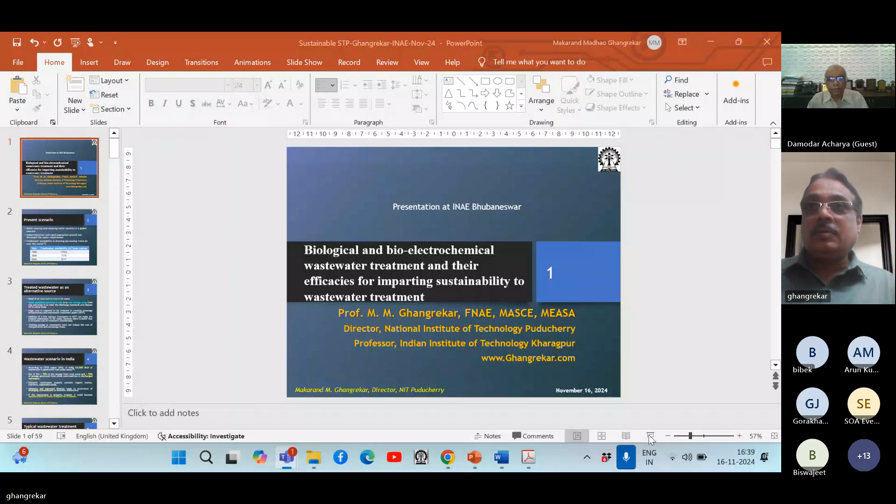Yes, sir. Yes, yes. Just, sir, confirm my presentation is visible. What, visible? Yeah, thank you, sir.

Thank you, Professor Damodar Acharya, for giving me this opportunity to present the work majorly that we have done, that we have been doing at IIT Kharagpur under various projects, and also the other institutions like IIT Bhubaneswar, NISER Bhubaneswar, CSIR Lab, and Shiksha Anusandhan, for organizing this event, and for the initiative taken by Professor Acharya to invite me. Also thank you, sir, for the elaborate introduction that you have given.

Over the next 1 hour, I'll be delivering a talk on the application of biological and bioelectrochemical systems for imparting sustainability to wastewater treatment.

We are all aware that water scarcity is being faced by almost all countries, and ensuring water security is a global concern now. Particularly in the Indian scenario, if we look at every year, there is a drop in the availability of fresh water. It is estimated that what was 17,500 in 1960, the fresh water availability will reduce to about 5,700 meter cube per capita by 2025.

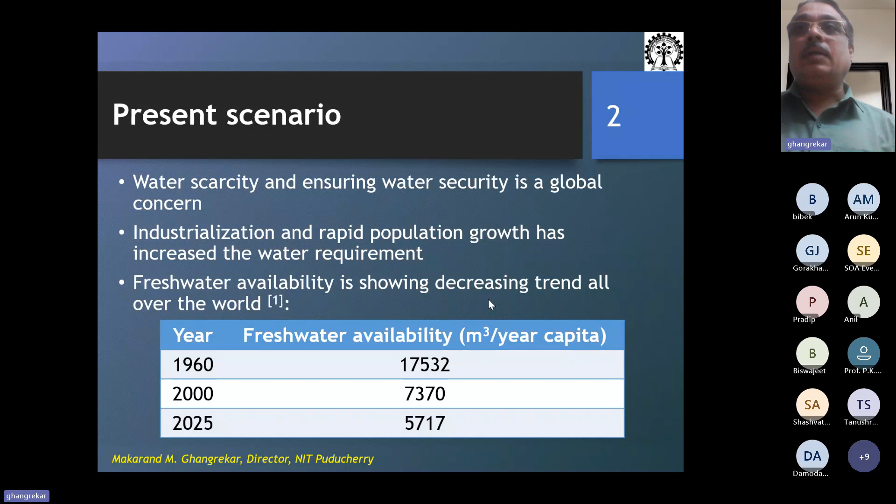So to meet this gap in demand, we need to find alternate sources for water. We consider that the municipal wastewater generated in all the cities could be considered a reliable source, provided we are able to offer treatment at affordable cost to this municipal wastewater to produce reusable quality treated water.

Now, what are the sanitation practices currently being followed in most cities in India and many other countries? It is centralized sanitation. In this system, all sewage generated from the city is collected through a network of pipes, what we call a sewerage scheme, and it is taken far away from the city where it is partially treated or treated, and the treated water is disposed of.

Now, with this model in place, if we target reuse of the treated sewage back in the town, then a third set of pipelines need to be laid, which will be a very costly affair. Already we have a water supply scheme, already we have a sewerage network, and then placing a third network, that too bringing the treated sewage from this far distance, will be a costly affair.

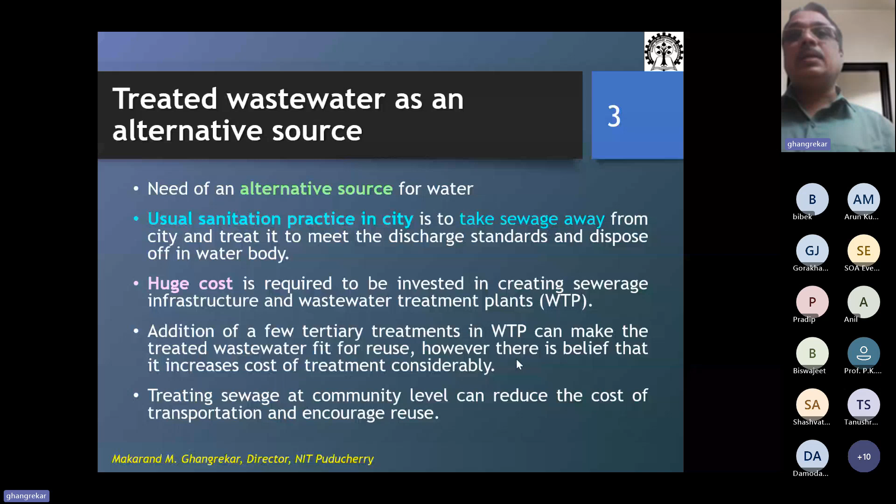Hence we need to go for decentralized sewage management. So sewage generated from a locality should be treated there itself using proper technology choice, which offers reliable treatment so that the treated water reuse can be facilitated.

The Indian scenario is not very encouraging. As of today, though the Government of India is very much aggressive in improving the sewerage infrastructure, even today only about 37% of the sewage generated in this country is being properly treated, and the rest is being discharged into water bodies, polluting various water sources wherever the water is getting discharged.

This domestic wastewater majorly contains organic matter, nutrients, other suspended solids, pathogens, and the concern today is the presence of emerging contaminants - personal care products like shampoo, skin ointments, other cosmetics we use, and also antibiotics or painkillers we consume. These are not consumed 100% by the body, and 50 to 70% of it is released through waste. So these are the compounds which are released into the water body, preventing its reuse for various purposes.

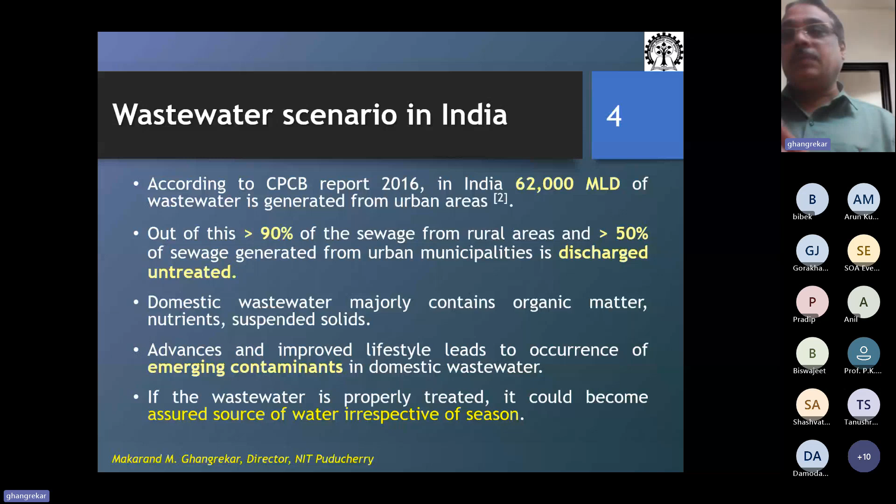If we are able to provide reliable and proper treatment to this wastewater, then irrespective of the season, the municipal wastewater is an available source. We all know that many states during summer, when there is a shortage of water, cut down the water supply by maybe 10%, 20%. That scenario will not be there, because if the sewage is being properly treated, the municipal wastewater properly treated could offer a reliable source.

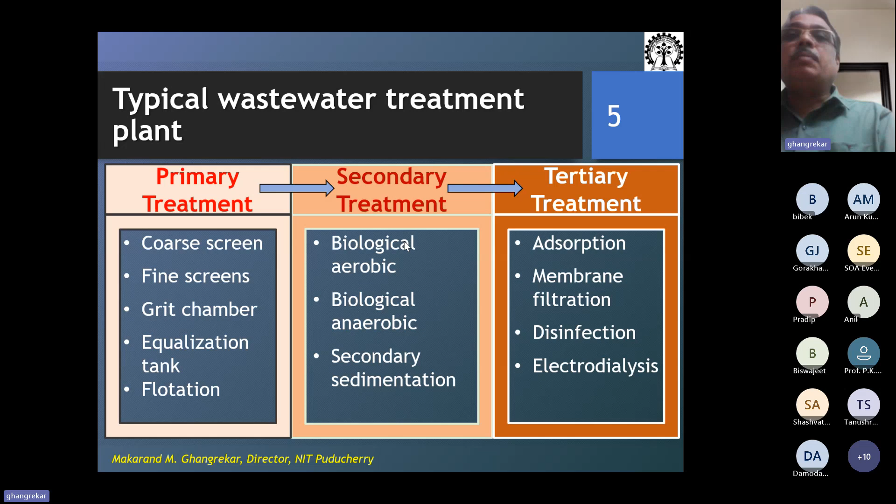Majority of you may be aware that typically the wastewater treatment systems, whatever wastewater treatment plant, we classify into primary treatment, secondary treatment, and tertiary treatment, provided we are targeting to reuse that wastewater. Generally, when we say conventional sewage treatment plant, it comprises primary and secondary treatment only, producing treated water not that suitable immediately to be reused for various purposes.

Primary treatment is necessarily meant for removal of floating and suspended matter, and removal of grit or inorganic matter.

Yes, sir. I'm audible, sir.

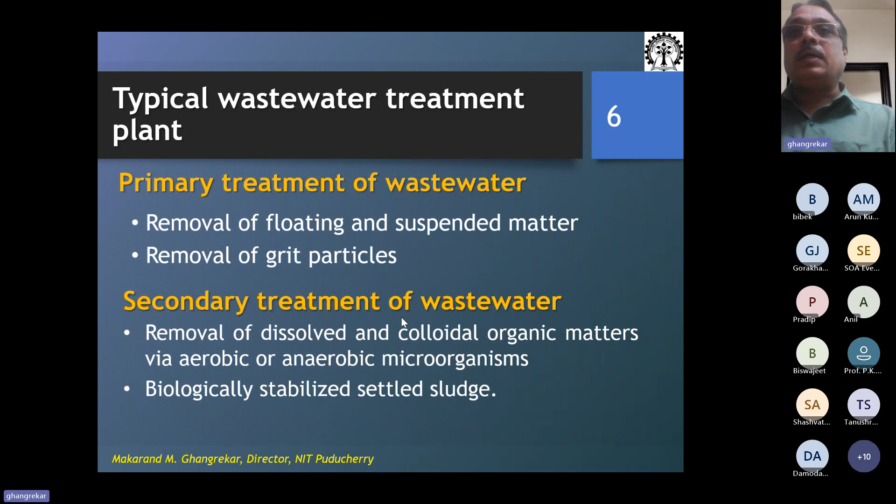So removal of suspended and floating matter is done through primary treatment. Secondary treatment is typically employed for removal of organic matter which is present in colloidal or dissolved form after primary treatment. Also, the sludge generated in the process is managed while secondary treatment is provided to the wastewaters.

The secondary treated effluent may not meet reuse quality norms, and hence further treatment, which we classify as tertiary treatment, is required for further removal of organic matter, nutrients, turbidity if any, pathogens, and color and odor removal. Generally, in municipal wastewater, color and odor are due to the presence of organic matter, and if we remove this organic matter effectively, the color and odor will go away.

But the major and emerging concern is the presence of emerging contaminants, like personal care products, antibiotics, and painkillers. These are present individually in nanogram or microgram per liter concentration, but put together they represent about 20 to 30 milligram per liter in terms of total organic carbon. This is why we are hesitant to call the water potable even after adequate treatment, if these emerging contaminants are present.

Because some of these compounds are endocrine disrupting compounds and can disturb the hormonal system, even human hormonal systems, even at much lower concentrations if present in the water we consume.

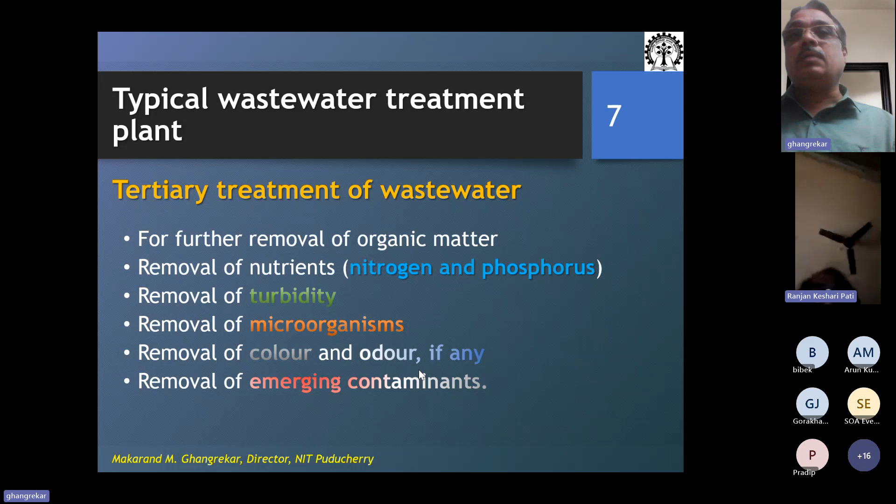The National Green Tribunal in 2019 came up with a very ambitious recommendation that for mega cities, municipal wastewater should be treated to a pH of 5.5 to 9, BOD less than 10, TSS less than 20, COD 50, total nitrogen 10, and total phosphorus less than 1 milligram per liter. They also made a stringent standard for fecal coliforms, which are of intestinal origin: desirable 100 and permissible 230 MPN per 100 ml.

Whereas the Ministry of Environment and Forest has accepted more or less the class 1 city standard, that is BOD 20, TSS 30, COD 100, and total nitrogen 15. However, we anticipate that any new sewage treatment plant coming up for urban areas should meet the NGT recommendation of BOD 10 milligram per liter, COD 50, and total nitrogen 10 milligram per liter.

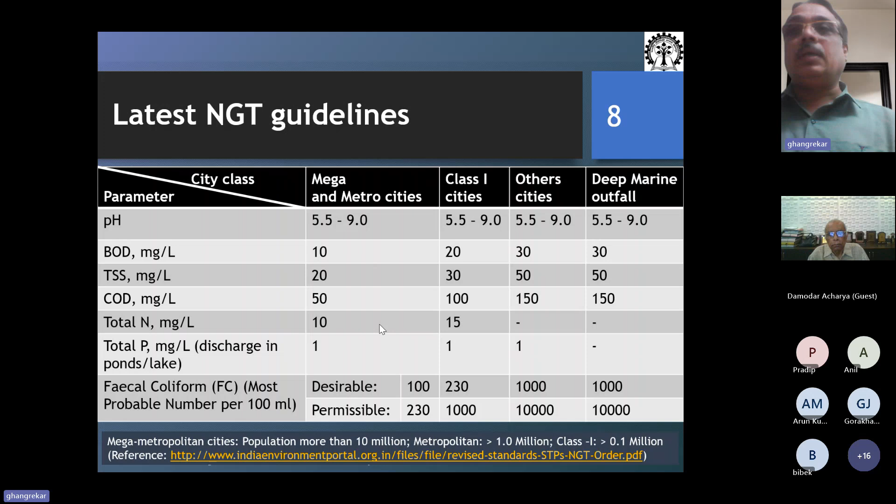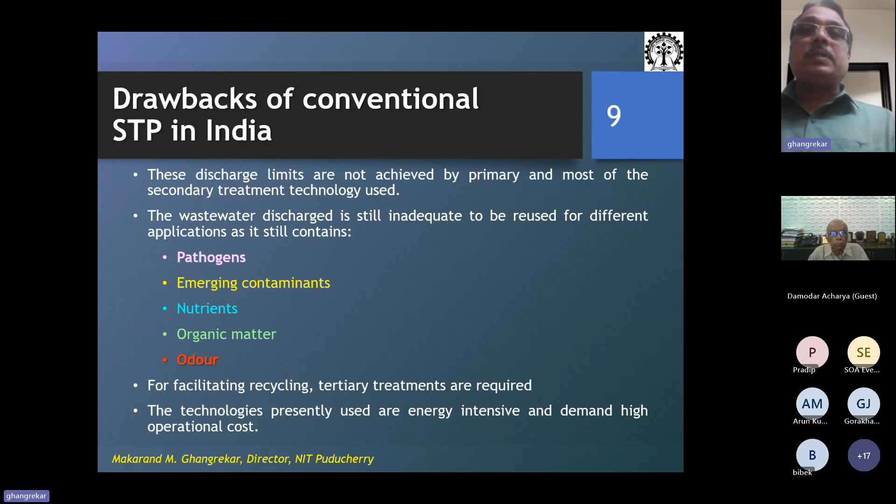So the drawbacks of conventional sewage treatment plants, with primary and secondary treatment, in India most sewage treatment plants employ the activated sludge process. These NGT expectations are difficult to meet because it still has considerable pathogens, emerging contaminants, nutrients, and organic matter, and because organic matter is present, there is also residual odor in the secondary treated effluent. To facilitate recycling, we certainly require tertiary treatment, which should be affordable.

We all know RO could work as an effective tertiary treatment solution. However, considering cost in the Indian perspective, depending on plant size, using RO after secondary treatment will cost about 30 to 50 rupees per kiloliter of water processed. So primary and secondary treatment costs around 10 rupees, plus 50 rupees if I add RO. If we end up producing treated water at 60 rupees per kiloliter, obviously there will not be takers for this, so we need to keep cost under control.

For that purpose, we need to select mid or low energy consuming technologies, and technologies involving low cost components, so that periodic replacement of perishable components doesn't add significantly to treatment cost. At the same time, the technology should be robust to seasonal variation, and should be able to give expected and reliable performance.

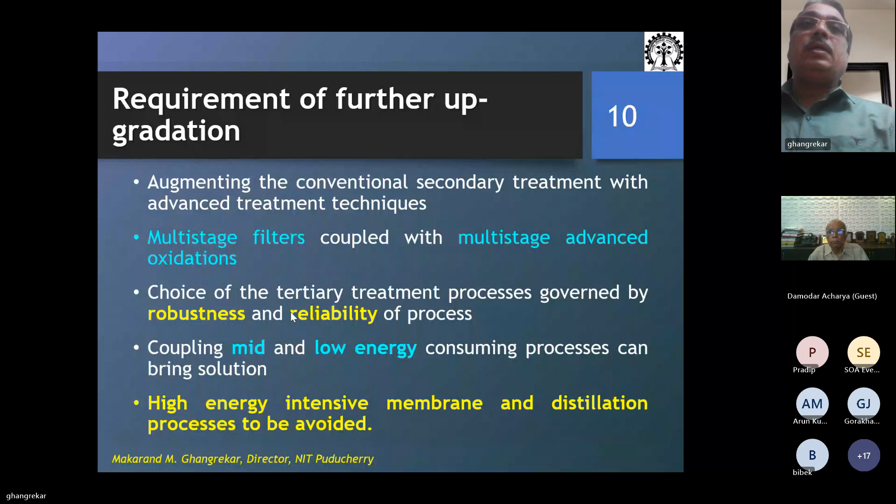For imparting sustainability to sewage treatment, so that stress on freshwater demand can be reduced, we can explore algal technologies. Harvested algae can be utilized as a feedstock for biofuel production, giving us an opportunity for revenue generation.

In the last two decades, scientists have been concentrating on developing microbial fuel cell-based technologies, which is a one-step process. While treating wastewater, it also provides an opportunity to harvest electricity directly in that one step, so the electricity can be used on site, fetching additional revenue.

Sewage sludge to activated biochar: in the last 5 to 7 years, scientists have been concentrating more on this aspect. This biochar or hydrochar generated from sludge has applications in tertiary treatment as an adsorbent, or in other industrial effluent treatment plants. This biochar can also be used as a soil amendment for enhancing crop productivity, or this hydrochar can be used for other industrial applications, or as a fuel since it is a high calorific material with calorific value at par with coal.

Biomethanation is now an almost mature technology. According to my knowledge, in India we have more than 50 large-size sewage treatment plants employing anaerobic reactors for recovering methane while treating sewage.

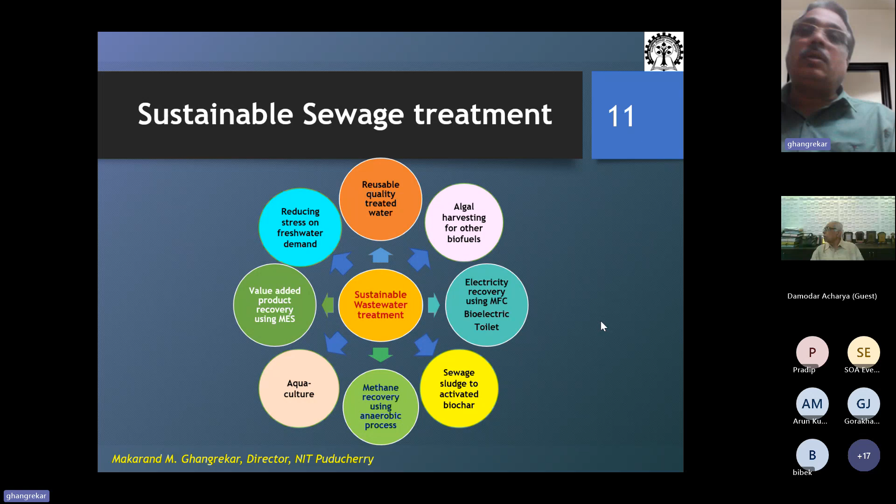So the list is not complete. There are many other avenues, but at IIT Kharagpur, me and my research group mainly touched upon these technologies for imparting sustainability to wastewater treatment.

So in 2015, with funding received from the Department of Science and Technology and European Union, we constructed a UASB - upflow anaerobic sludge blanket reactor-based sewage treatment plant with a capacity of 400 cubic meters per day. This plant was designed by me, and since then it is in operation.

With a height of 5.3 meters and diameter of 5.6 meters, it treats sewage generated majorly from the academic area, so it receives very dilute sewage.

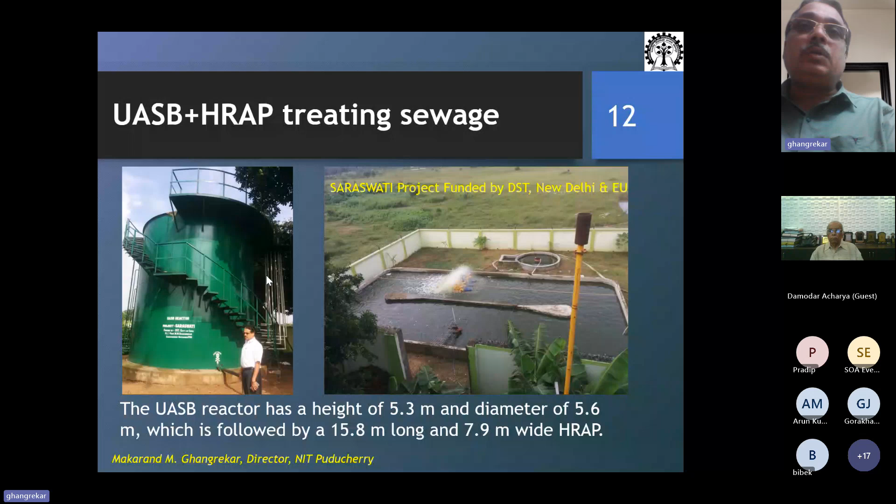We commissioned this reactor in the month of November, which is typically winter season, hence it took a little longer time to reach the expected performance. But after 5 months, the plant started giving satisfactory performance with COD removal efficiency - COD, for those not conversant, is chemical oxygen demand, the organic matter concentration present in wastewater that we measure.

This total COD removal efficiency in summer, this plant is demonstrating close to 78%. And in winter, where the temperature drops down, it is still capable of giving more than 60% removal efficiency.

You can note the influent COD concentration - it is very dilute wastewater because of the academic campus we generate it from. The annual average COD is around 230 milligrams per liter. So while treating such low strength wastewater, even using anaerobic wastewater treatment technology, it demonstrates more than 70% COD removal efficiency all year round, and BOD - biochemical oxygen demand - removal efficiency is above 80%.

Quite satisfactory performance. One of the peculiar characteristics of this plant is biomass granulation. Those from a biotechnology background can understand the agglomeration of biomass, the different species involved in finally converting fermentative reduction of organic matter to methane. When all the species stay close to each other, it enhances the reaction rate kinetics, and that is the reason this plant gives high performance.

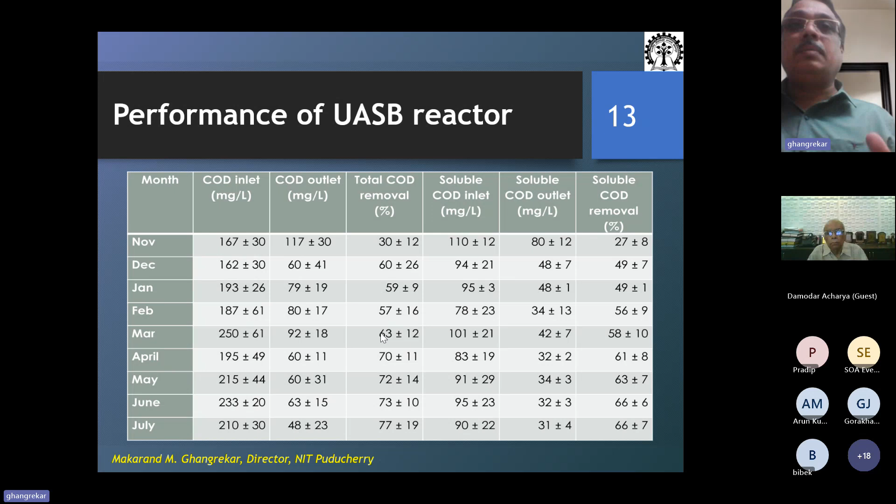Then the UASB reactor effluent is treated in the high rate algal pond. This pond is typically designed for further removal of organic matter. The UASB reactor generates effluent with 40 to 50 milligrams per liter of BOD, and this high rate algal pond polishes it to give around 20 to 30 milligrams per liter of BOD effluent.

Then it contributes to removal of nitrogen because of uptake by the algae, and also phosphorus. Ammonical nitrogen removal of more than 85% and phosphorus removal of more than 90% is being demonstrated by this high rate algal pond.

Also, due to growth of algae, when the pH of the wastewater rises to about 9, that helps in naturally killing the pathogens present in the wastewater. So natural die-off of pathogens occurs up to 3 log scale, and this way it generates effluent with 600 to 700 MPN per 100 ml.

So in 2015, when the allowable limit was 1000 MPN per 100 ml, this effluent was suitable to be reused for horticulture purposes on campus, and we were using it.

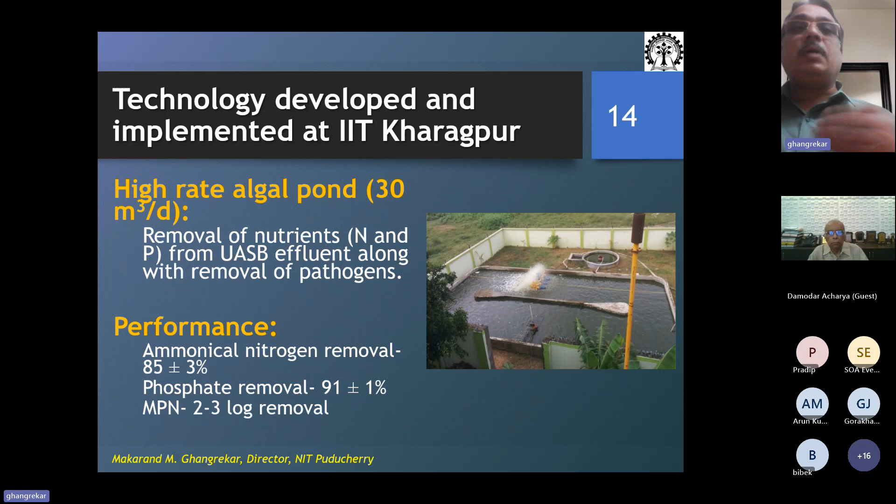But because of the implementation and recommendation of the National Green Tribunal, this high rate algal pond plant is not meeting the NGT requirement, and hence we modified and explored other options for providing treatment to meet the NGT norm. One of the technologies we are demonstrating is again with funding received from the Department of Science and Technology and European Union.

We are first time demonstrating in India the electrically conductive biofilter. So instead of the wetlands, which is typically used many places in India where the inert media is used for the bed, here we are using coal. So met coke is the product that we are using as a media.

The wastewater from the effluent from the UASB reactor is applied in the two zones of this electrically conductive biofilter. Each zone has a 0.6 meter depth of the coal media. And while the wastewater trickles over the media, it comes in contact with the biofilm formed on the media, and

that way the organic matter removal happens. Then the effluent of this electrically conductive biofilter is taken to the anoxic tank for facilitating denitrification, and then the pressure sand filter followed by electrochlorinator and UV combination for effective disinfection, and finally activated carbon filter.

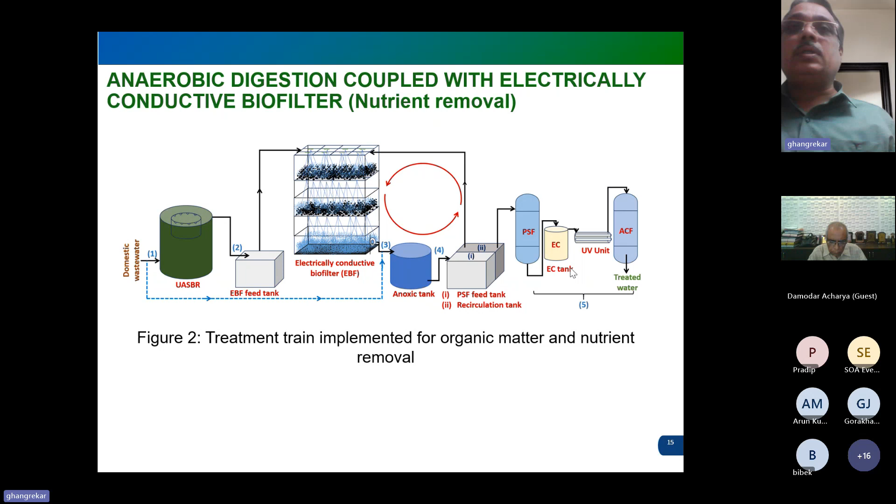We operated the plant in different operational modes. Without recycling, it did not give satisfactory nitrogen removal, though the COD removal was appreciable. But with the recycling, two is to one, treated water we recycle back so that the dilute loading has been applied on the media, and also we

annex it with the anoxic zone. So the last compartment we made it an anoxic zone to support denitrification. That way, we are able to meet the effluent standards with COD removal more than 70%.

The percent number may look small, but the influent itself is 90 to 100 milligram per liter of COD. So from that, it is removing 70% COD, producing 30-40 milligram per liter of COD effluent, which is much less than the recommended standard by NGT. It is also removing effectively nitrogen, and the BOD all along is about 3 milligram per liter or lower.

So this is the performance result. pH is well within the limit. COD average over 13 months of operation is 23.5. TSS is 5 milligram per liter, whereas the recommended standard is 20. Total nitrogen standard is 10, whereas we are getting only 5.8. Total phosphorus is around 1 milligram per liter. And MPN, though the recommended norm is 100, it is all along less than 3 MPN per 100 ml. So the plant is giving reasonably satisfactory performance.

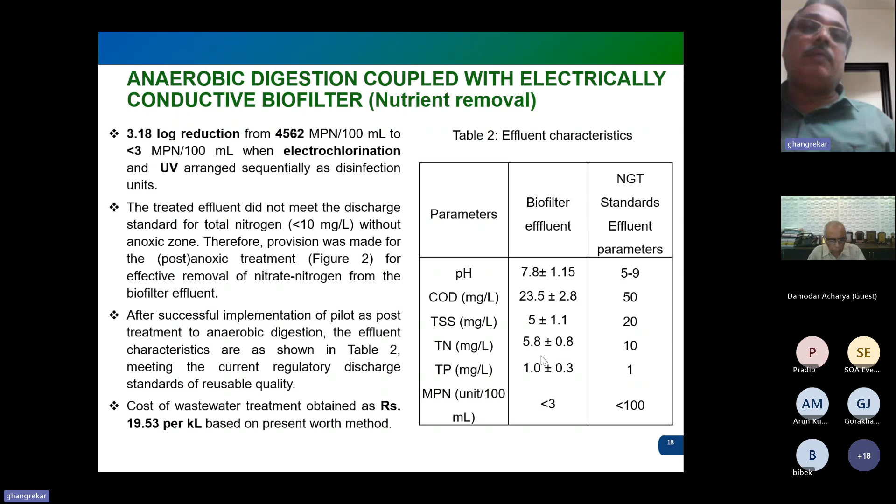For this 100 KLD treatment plant, 100 cubic meter per day capacity, we estimated the life cycle cost, considering 20 years life of the plant, around less than 20 rupees per kiloliter, including everything. So look at the quality of the treated water, which is much superior than the quality available in many of the river stretches in India.

The next technology that we are exploring, first time in the world, this large scale 100 cubic meter per day capacity plant has been tried, is at IIT Kharagpur. Our technology provider is TU Delft, Netherlands.

Based on their initial bench scale experiment, we started culturing, instead of algae, it is a common raceway pond, but the target here is instead of culturing algae, we would like to culture here purple non-sulfur bacteria.

The purpose of replacing algae with the purple non-sulfur bacteria is that these microorganisms have a single cell protein, and this protein harvested could be utilized as aquaculture food or animal food, or after pasteurization, it could be used as a soil conditioning agent or fertilizer, or the extracted protein can be used even for many industrial applications. So it has a high product value as compared to algae.

So the plant here we demonstrated as a high rate digester. It only helps in acidifying the sewage. And this acidified sewage is applied to this plant.

Initially, we tried with only a 2 meter cube capacity treatment plant with step increase in the capacity. Initially 500, then 750, then 1000, then 2000. And now we are experimenting with the larger plant of 100 cubic meter per day capacity.

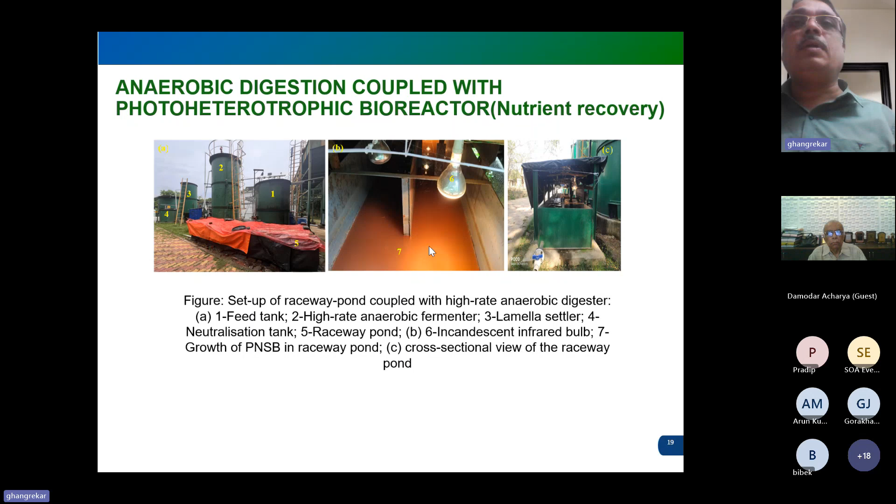Initially some challenges we faced, but with the efforts from our research scholar, we optimized the surface area to depth ratio, and the COD to nitrogen ratio. We evaluated the field conditions which are favorable for supporting growth of purple non-sulfur bacteria, and the performance of this plant is also appreciable.

We identified some of the strains of purple non-sulfur bacteria which are dominant in the plant. Even with the co-substrate, when we feed artificial jaggery solution, the performance is superior, with protein content in the biomass more than 40%. But when we try with only sewage, it is slightly less than 20%. We are still researching on it to enhance the protein content.

This high protein rich biomass, if we are able to harvest it, has much superior product value than the algae we typically grow in the high rate algal pond. This experiment is still ongoing, another 6 months we have this project running. For the final results, we'll try to enhance the COD removal efficiency, which is right now around 70%, and also the enriched biomass with high protein content.

Alternately, we tried with the combination of anoxic as well as aerobic MBBR, moving bed biofilm reactor. Partially the effluent generated from the UASB reactor, 100 cubic meter, we are treating in an electrically conductive biofilter, and the rest 300 cubic meter per day we are treating in the combination of anoxic MBBR, aerobic MBBR, followed by lamella clarifier. Then we have a three-stage disinfection cum advanced oxidation process in place, which comprises ozonation, chlorination, and UV.

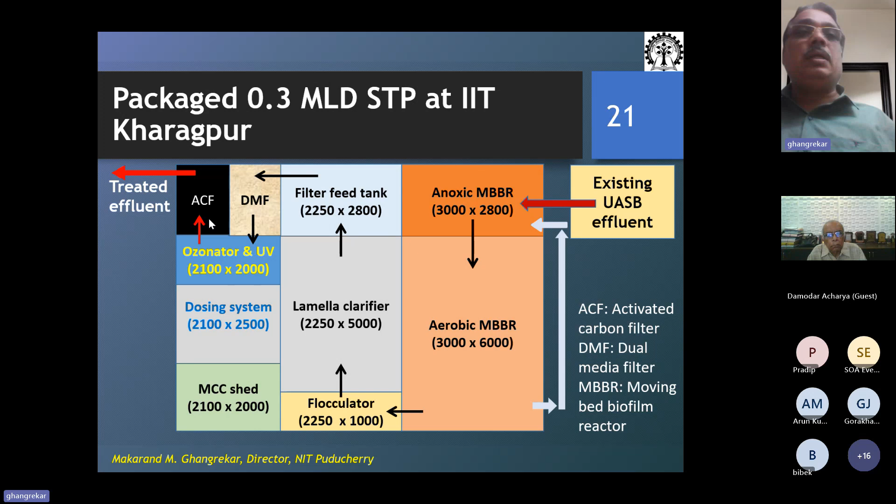We kept flexibility for experimentation purposes so that the order of this three-stage disinfection can be changed. But over the operation of more than 2, now more than 3 years, we realized that first ozonation, then chlorination, and then UV - this order helps in optimizing the performance. Finally we have an activated carbon filter to trap any disinfection byproducts formed, to produce final treated effluent suitable for any non-potable reuse.

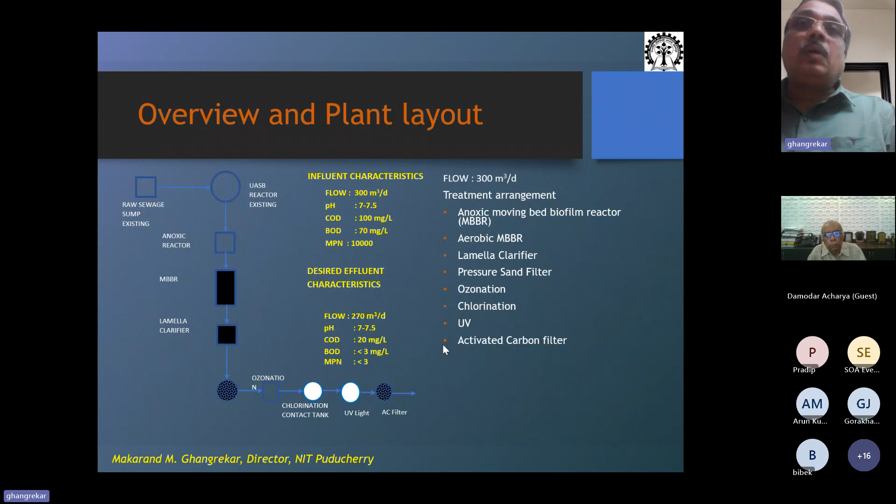This is the performance over more than 2 years of the plant, which will convince you that even the simplest technology without using RO can work. The soluble chemical oxygen demand is less than 20, that is 18 milligram per liter. Total COD is slightly higher, 23 milligram per liter. Suspended solids is less than 10 milligram per liter.

The coliforms, all along, most of the days it is zero. Sometimes we do get one or two, so it is always less than 3 MPN per 100 ml. The surfactant which causes foam on water bodies - we all hear about the foam formation in the Yamuna - is because of the presence of anionic surfactants which are there in detergents. That also we are able to completely remove from the sewage.

Then the total organic carbon, which represents personal care products, antibiotics, and all those compounds, is also less than 10 milligram per liter, provided we administer about 5 milligram per liter of ozone dose. But that consumes more energy. So when we reduce the ozone dose to about 2 milligram per liter, then the TOC in the effluent goes to 15 to 20 milligram per liter magnitude.

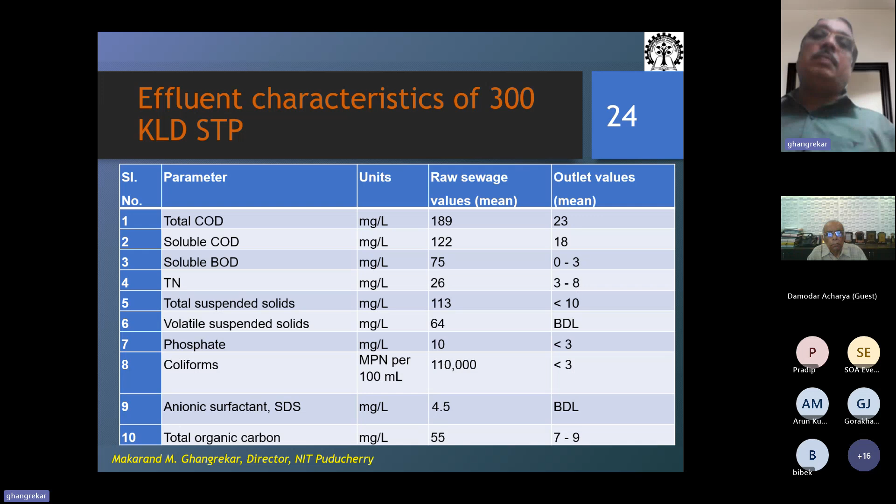For those who have curiosity, the TOC of the Kansavati river water, which we accept as a raw water source for IIT Kharagpur, is 30 milligram per liter. So this treated water is still much superior in quality compared to the raw water available in the Kansavati river. But still, I am not calling it potable water, because I know this around 15 milligram per liter of TOC is a culprit. If somebody drinks this water by accident, nothing will happen, but everyday drinking is not really recommended because of the presence of these traces of antibiotics.

Based on this experience, I'm lucky that the IIT administration accepted our proposal to treat 1.35 MLD of sewage generated from the hostels, which are located on the west side of the campus.

Traditionally, we have been pumping sewage to the east side, nearly 3 kilometers, with three stages of pumping station. That pumping itself is consuming energy. So to avoid that, we propose a 1.35 MLD sewage treatment plant right near the hostel so that the treated sewage can be brought back to the hostels for horticulture purpose.

And we do have ponds on campus which get dried, facing water scarcity problems in summer. So this treated water can be used for recharging these ponds during the summer.

The cost of treatment we targeted, since our cost of water supply in IIT Kharagpur, this is 2021 costing, is 27 rupees per kiloliter. And since we kept the cost to be less than 15 rupees for treatment of the sewage, there is a net saving of 12 rupees, and that will fetch the revenue return, the return on investment within 5 years of installation of this plant.

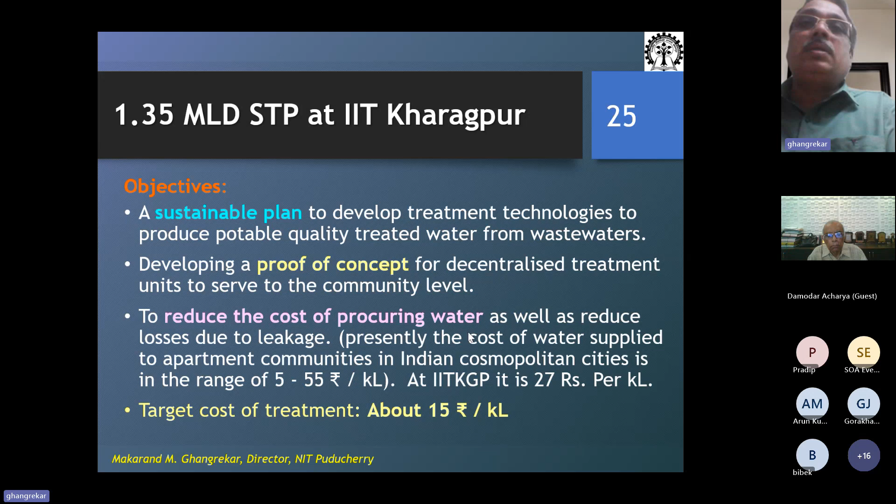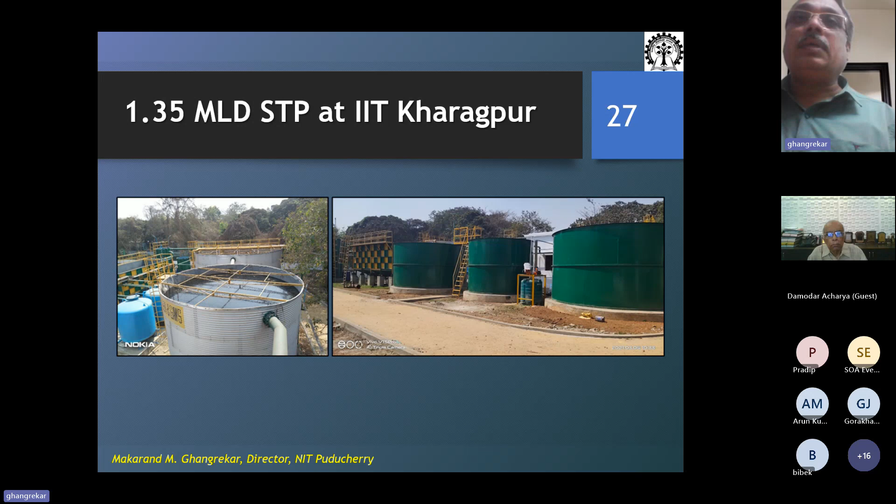This is the performance of the plant, more than a year of average performance, giving satisfactory results. Except, if you notice, for phosphorus we have a regimen of polyelectrolyte dosing, but we are not doing it because mostly the treated effluent is used for horticulture. Though NGT recommends 1 milligram per liter of phosphorus, this high phosphorus is actually welcome for horticulture purposes.

So whenever we are using it for pond recharging, we have to administer this polyelectrolyte dosing, then the phosphorus concentration in the effluent can be brought down below 1 milligram per liter. Otherwise this is okay. This plant is also giving satisfactory performance with MPN, the pathogen presence less than 3 to 5 in range, much less than the 100 recommended limit. So satisfactory performance of this plant has been observed.

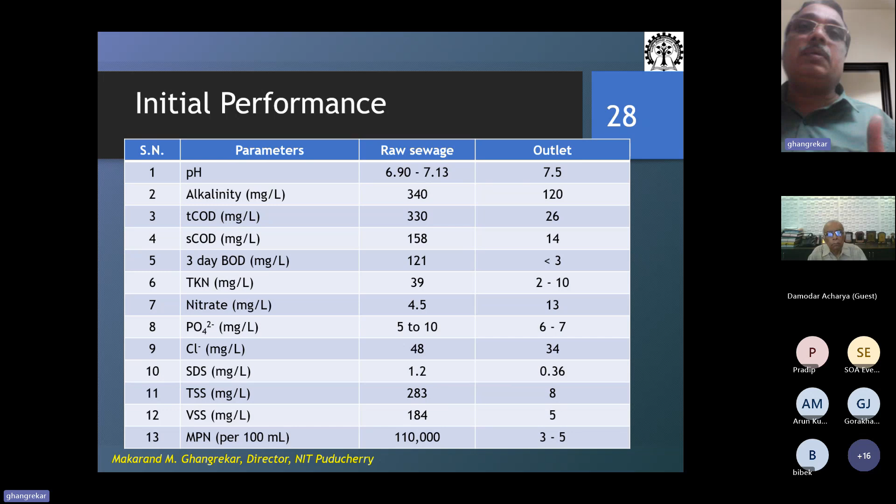And we at IIT Kharagpur are using this treated water. You can see there is an online monitoring system, so the performance of the plant can be monitored online. These are some photographs of the online monitoring system from the last month.

You can see BOD less than 10 milligram per liter and COD 25, sometimes giving around 35 to 32 milligram per liter of COD, well within the limit recommended by NGT. Marginally, sometimes it exceeds 11 because of the large size of the plant, so some fluctuation could be there.

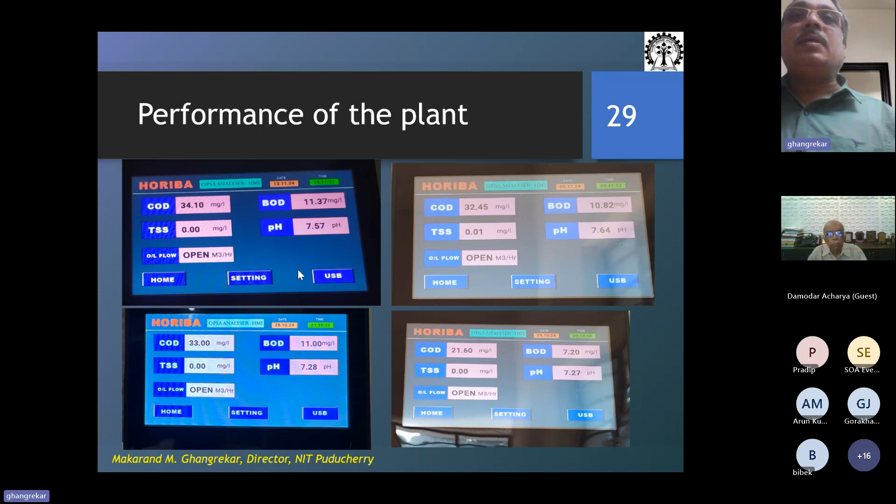Then what is interesting is we worked on the life cycle costing of this plant, for 300 cubic meter and 1350 cubic meter per day capacities. We considered different cases: suppose if we provide only primary and secondary treatment, what would be the life cycle cost? If we provide ozonation, what could be the life cycle cost? If we provide ozonation plus chlorination, and finally activated carbon filter, what will be the cost?

Then ozonation instead of chlorination, only UV, what could be the cost? And when all three disinfection processes are in place, what could be the cost of the plant?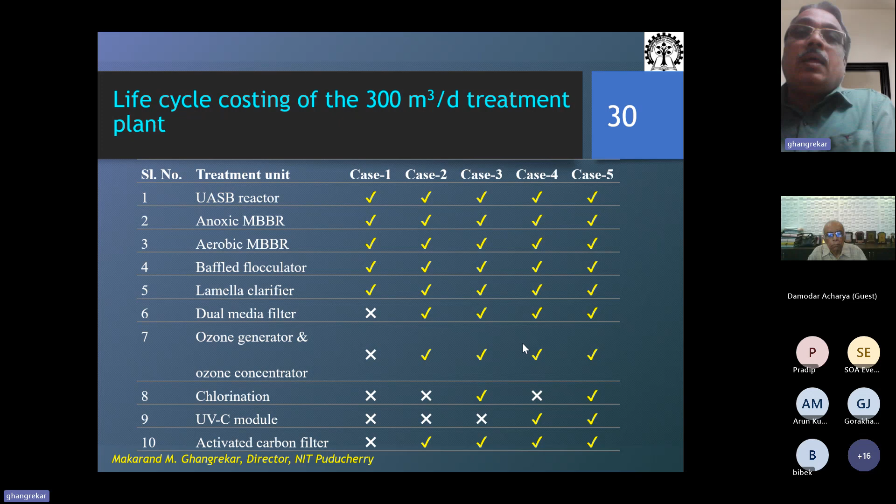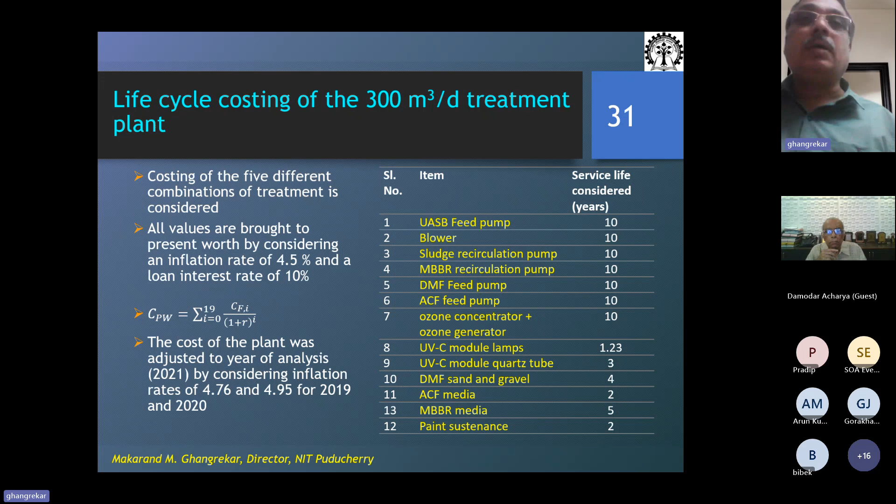Life cycle cost of the water that is processed, including all possible costs involved in the operation of the sewage treatment plant: plant construction, plant maintenance, periodic replacement of perishable components like pumps and diffusers, media, contractors' profit, third-party certification. All those costs we considered in the life cycle of this plant, even the administrative cost.

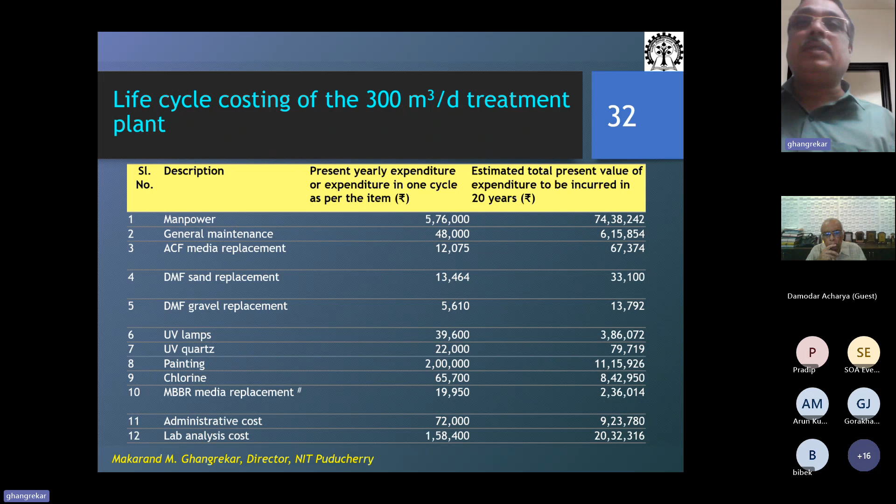So considering all those costs, we worked out the present worth, and based on this, suppose if we have only primary and secondary treatment in place, the manpower component is the highest cost component, capital cost is second, and energy is third. Whereas when we install tertiary treatment, obviously the energy need and demand is more.

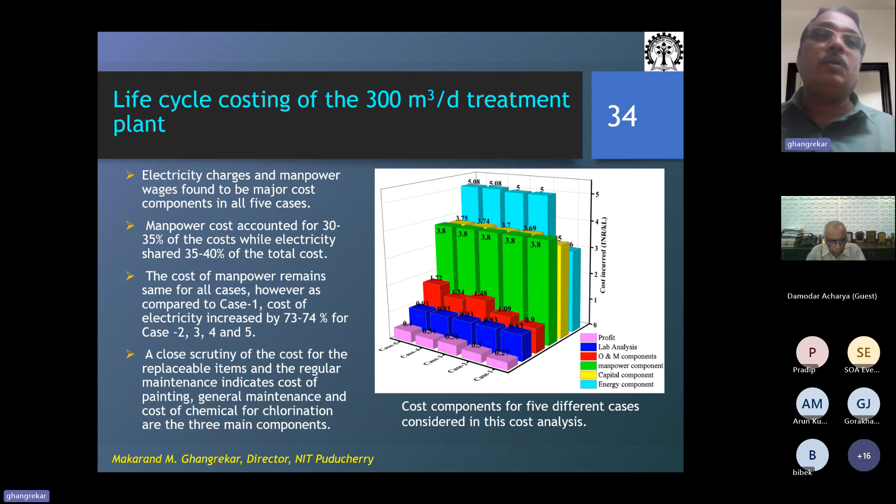But if you see the variation, when all three processes are in place, the net increment in energy cost is not much, only about 10 paisa increment when all three disinfection processes like ozonation, UV and chlorination are there. So we can get more reliable performance of the plant, and the life cycle costing comes out to, for 300 meter cube per day capacity, less than 16 rupees per kiloliter in 2021 costing.

Since the plant size is increased to 1350 meter cube, we are able to produce water at less than 11 rupees per kiloliter, which is suitable to be reused on campus for any non-potable purpose. IIT Kharagpur is happily using this water for fulfilling various water demands, and it is actually leading to savings in the water pumping cost, as well as savings in the pumping cost of the sewage.

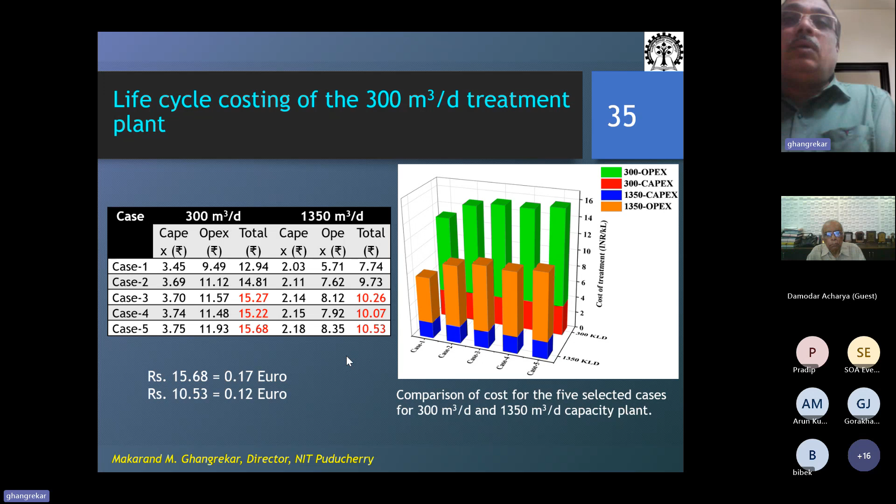Which otherwise we were doing to pump it to the oxidation pond 3 kilometers away from this location. So far I shared with you the technology which is ready for implementation elsewhere. At the same time, parallelly, our emphasis is to work on upcoming technologies, and we are among the recognized laboratories in the world for our contribution in the bioelectrochemical system.

The most popular configuration of the bioelectrochemical system is a microbial fuel cell. It comprises of an anodic chamber and a cathodic chamber, where respective electrodes are housed. On anode, instead of methanogens, we target to culture electrogens. These electrogenic microorganisms oxidize organic matter and convert it into protons, electrons, and organic carbon to CO2. These protons are allowed to pass through the separator, which separates the anodic chamber and cathodic chamber through a membrane.

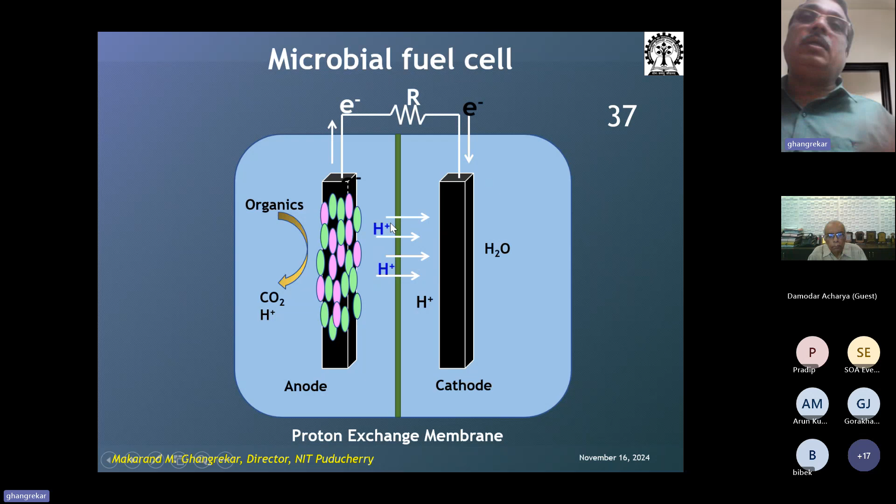Typically, it's a proton exchange membrane, which allows protons to migrate from the anodic chamber to the cathodic chamber. The external circuit is provided through the external load, whatever device we would like to power. Through that device, the circuit connects it to the cathode, so there is electron flow externally towards the cathode, making the electricity flow happen in the other direction. That's a normal convention in electrical engineering. On the cathode, these protons and electrons generally get combined with oxygen, which is typically supplied through aeration, to form H2O. This device can offer a convenient, affordable solution for treatment of wastewater, simultaneously providing the capability to harvest electricity while offering treatment to the wastewater.

The advantage of these BES systems is that they are a sustainable green energy technology for wastewater treatment, with the ability to generate electricity from various wastewaters. Almost all biodegradable wastewater could be used as fuel for this MFC. It converts chemical energy stored in the organic matter into electricity in one step, so high energy conversion efficiency is thus possible. It operates at ambient and low temperature, hence there is no noise or other nuisance, and there is less sludge generation—one third to one fifth as compared to the conventional aerobic process.

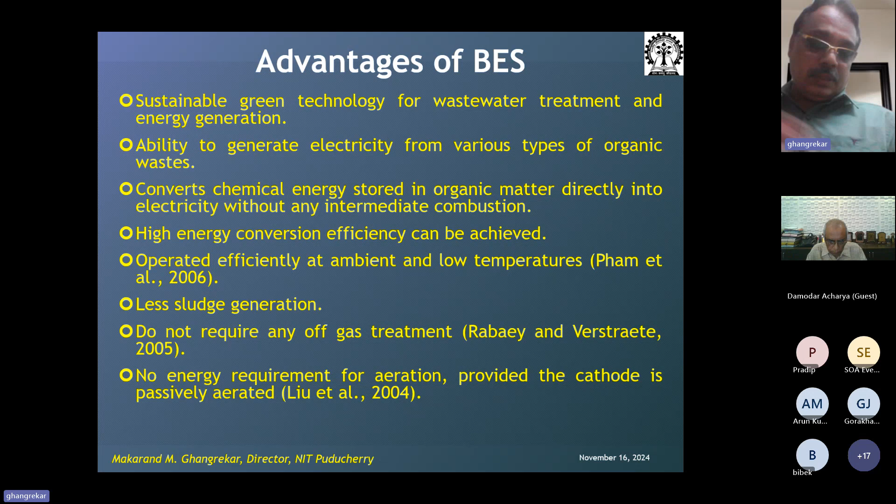It does not require any off-gas treatment as required in the anaerobic reactor, where the biogas is a combination of methane, CO2, H2S, ammonia, and many other gases, which requires gas reforming. That reforming is not required here because our final end product itself is electricity. So no energy is required for aeration, since the cathode is configured as an air-breathing cathode—directly oxygen from the air can be breathed by the cathode. With that configuration, there will not be any aeration cost involved, so that way it will afford reduced operational cost.

Though this technology looks prima facie exciting, there are challenges. A single MFC theoretically can give about 1.1 volt, but because of the involvement of activation loss, concentration polarization loss, and ohmic loss, the actual voltage we obtain ends up around 0.5 to 0.6 volt. So a single MFC will not give us usable electricity—we need to have devices in a stack.

If I have a target of integrating voltage, then I need to connect them in series. If I have a target of integrating current, then it has to be connected in parallel. But when connecting in series or parallel, the stack itself has a problem of overshooting the potentials, and then the system may not give adequate performance. So the challenge scientists are working on all over the world poses a scaling-up challenge. I can have a 300 to 400 meter cube size single UASB reactor for biomethanation, whereas here, because of the involvement of electrochemistry, I cannot have more than 20 to 30 liter volume for a single device. So if I have to treat 1 MLD of wastewater using MFC as a technology, I will require multiple MFCs, and handling those in a stack and feeding them itself would be a challenging engineering problem that we need to find solutions for.

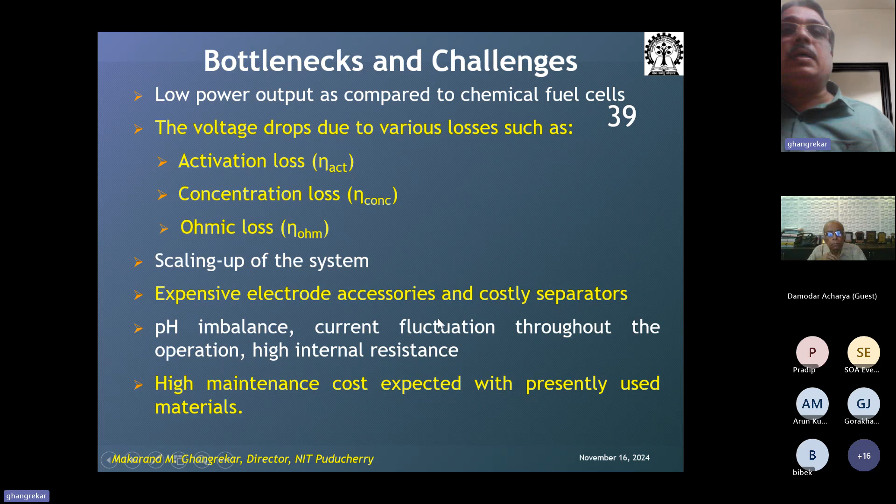Then there are other challenges like pH imbalance, current fluctuations, and higher internal resistance, which are typically present in any biological reactor. And there is high maintenance cost from using Nafion membrane, which requires periodic maintenance and replacement.

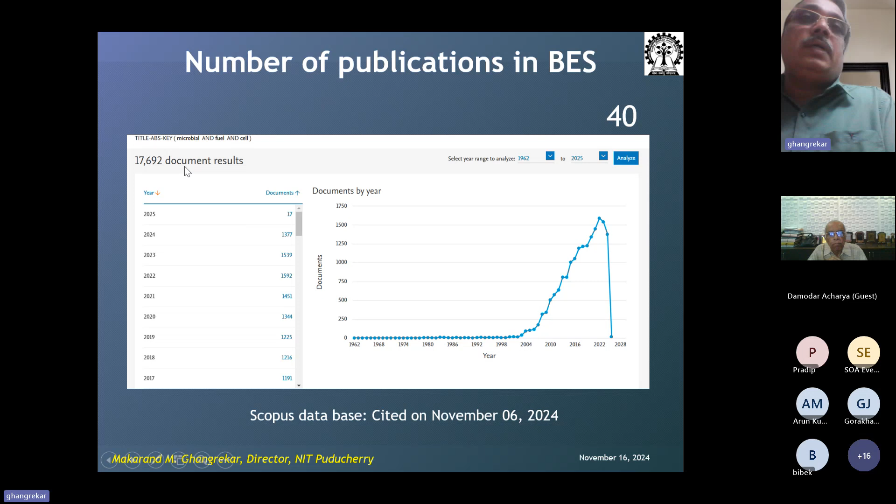The first paper on MFC was published in 1911 by Potter from UK. Then the second paper in 1935, third sometime in 1965, fourth in the 80s. Since 1999, scientists have paid more attention, and there is a surge in publications. Till this month, there are around 17,700 papers published as per the Scopus database.

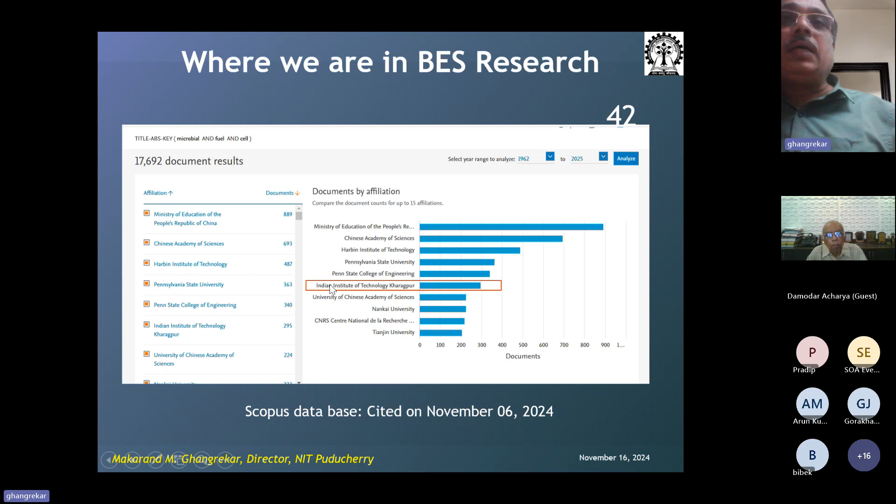This is where our research group stands. After Bruce Logan from Penn State University, our research group from IIT Kharagpur has contributed more than 200 articles addressing different issues related to the development of microbial fuel cells and bioelectrochemical systems. As an institution, IIT Kharagpur ranks fourth - the first two are Chinese funding agencies listed by Scopus as institutions, but institute-wise, after Harbin and Penn State, we are fourth in the world for contribution in this domain.

So nearly 20 years of our research efforts at IIT Kharagpur, we worked on ceramic membranes instead of Nafion. Clay pots or clay utensils - clay itself has a natural cation exchange capacity. It may not be specific for proton, but cation exchange capacity also helps in proton migration by allowing the hopping mechanism for proton transfer from one side to the other. So we tried with different soil collections.

We realized that clay with montmorillonite minerals, if we add 20% montmorillonite, this ceramic membrane could establish similar properties compared to Nafion at much cheaper cost. This ceramic membrane can be produced - one square foot at the cost of 20 rupees, whereas Nafion costs 1700 US dollars per meter square. So imagine comparing the cost - this is one of the breakthroughs.

Then secondly, this device is challenged by the growth of methanogens. Though we target electrogens to grow in the system, methanogens also grow in similar environmental conditions, so they dominate in the system. Methanogens consume substrate and produce methane rather than allowing electrogens to consume substrate and produce electricity.

So we came out with natural solutions. Other scientists have used chemicals, but since this is a wastewater treatment device, if I add toxic chemicals, downstream I would have to treat for those chemicals, which is a more costly affair. So we came up with plant-based solutions - natural plant extracts, eucalyptus extract, or selected algae extracts could suppress those methanogens, and periodic dosing of these plant extracts helps control methanogen growth.

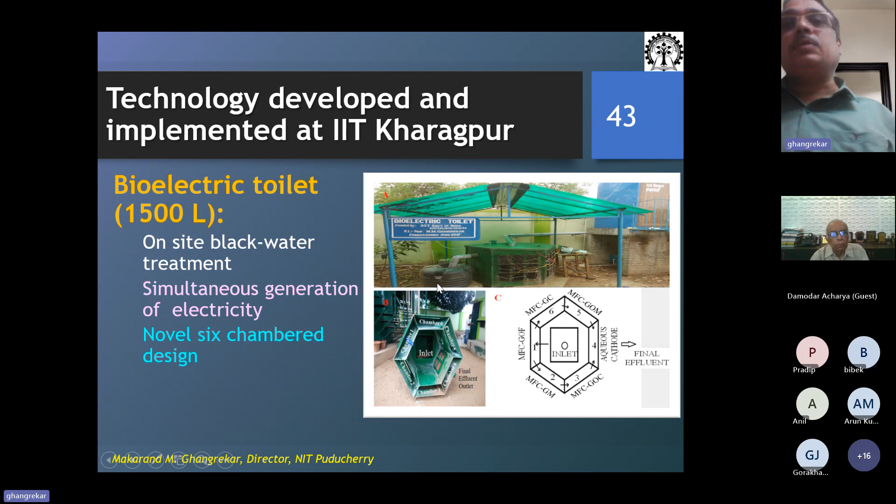So even for flushing the toilet, the water we use should be free from pathogens. Hence, this system is providing less than 100 MPN per 100 ml effluent using different cathode catalysts we experimented, and this is the performance.

The treated water has BOD less than 23 milligrams per liter, COD less than 80 milligrams per liter, and MPN throughout - this is a 2.5 year performance result I am averaging, so less than 100 MPN. That makes the water suitable to be reused back in the toilet for flushing.

So once a day, we are pumping it back to the toilet using a solar power pump. And that way, once you flush the toilet, an equal amount of treated water will be displaced from the system. And once a day, we pump it back.

So this will, in that way, impart a significant reduction in water consumption in the toilet, and it can be classified as a water-saving toilet.

People are reluctant to use toilets constructed in remote areas because of water scarcity, and that leads to filthiness in the toilet, so people stop using those toilets. If we install such a system, water will always be available, and Indians are typically cleaners.

We use water for cleaning, so half a liter or 1 liter of water that we use for every use of the toilet will compensate for the evaporation loss occurring in the system. And this way it will perfectly make it a zero liquid discharge toilet.

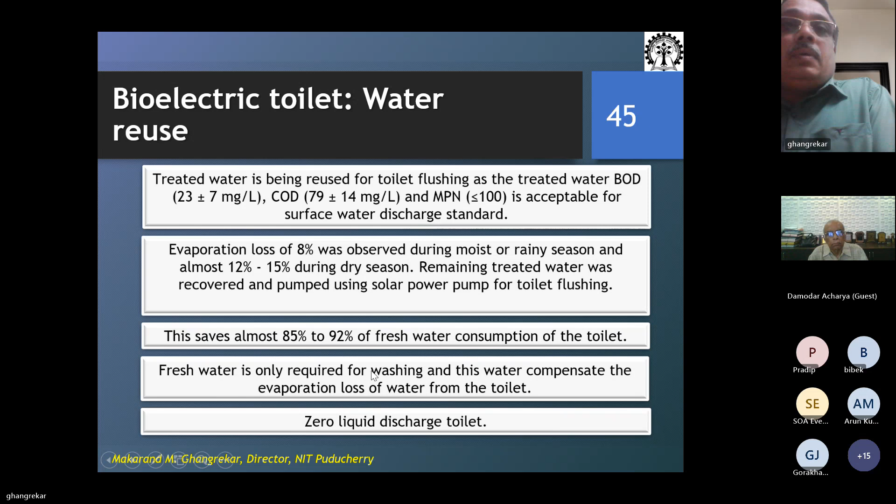Then the electricity generated in the process can be used for illuminating the toilet premises at night, and even the toilet cabin at night. This way, fearless use of the toilet can be encouraged.

Women, children, and infants are typically reluctant to use the toilet at night because of the fear of insect attacks. So if we illuminate the toilet premises, that fear will also go away, and that will encourage the use of the toilet.

So they get charged in parallel, and once you put on the switch, the circuit connects them in series so that the electricity can be enhanced to illuminate the LED lamps.

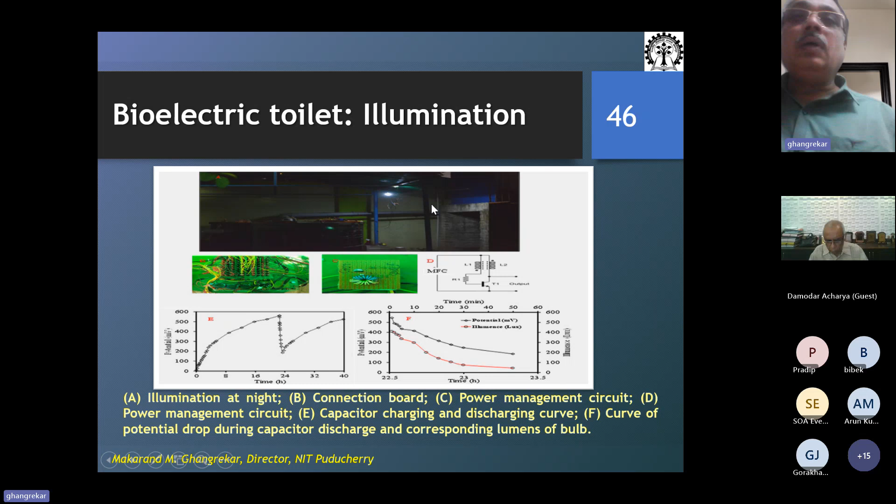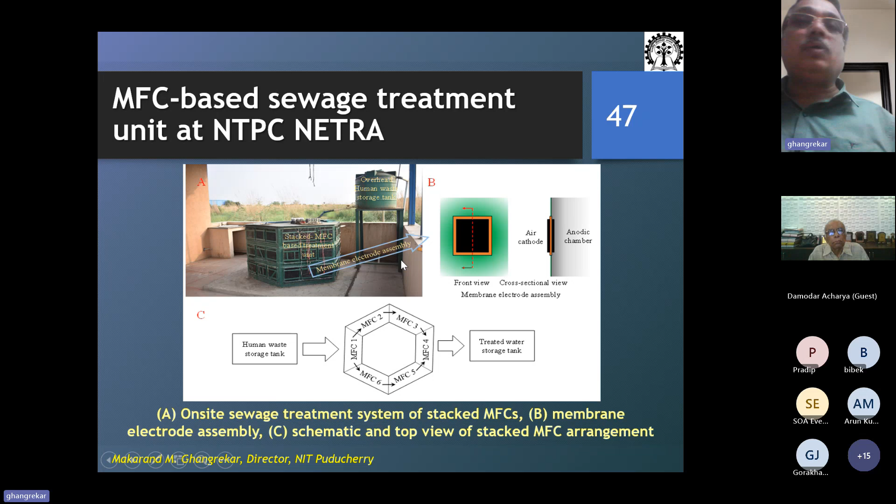We had another installation at the NTPC Netra campus in New Delhi, and there also, for the wastewater generated from the guest house, we could treat it successfully for 2 years, and they are also happy with the performance of this MFC-based treatment system.

As I was talking about the microbial fuel cell system, this can also be configured as an MFC plus desalination system. So instead of two chambers, I use an anodic chamber operated in a similar fashion as the MFC, a cathodic chamber also operated in similar fashion as the MFC, but there is a separate chamber, what we call the desalination chamber, housed in between the anodic and cathodic chambers.

So either the same wastewater can be applied here to facilitate desalination if any industrial wastewater has high salt concentration, or saline water can be admitted to facilitate desalination. Because of the potential difference between anode and cathode, charge migration also occurs in this system, and the anions migrate towards the anode while cations migrate towards the cathode, which helps desalinate the wastewater in the middle chamber.

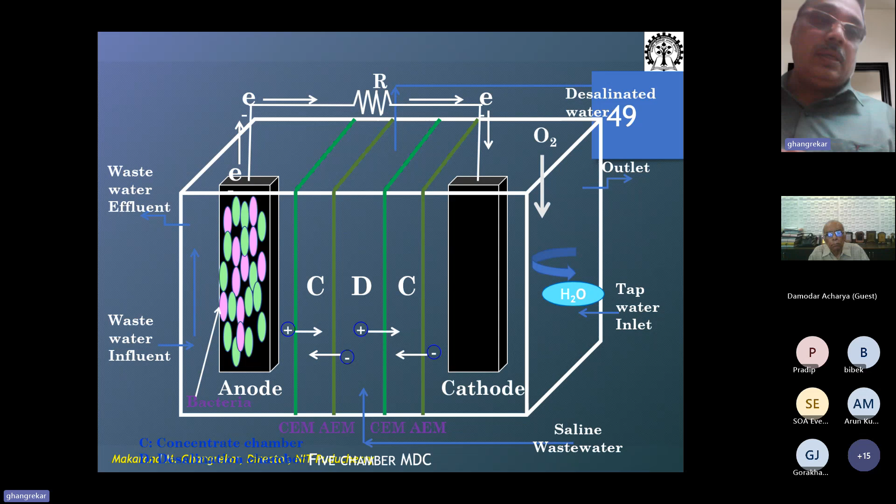We had a project from Tata Steel for their steel industry effluent. We used a five-chamber MDC for that purpose, using actual steel industry wastewater spiked with Pseudomonas aeruginosa microorganisms, what we call bioaugmentation. We could get very satisfactory performance: 80% COD removal, coulombic efficiency around 14%, and TDS removal from the actual industrial effluent up to 78%, which is acceptable for them.

They are not looking for 100% TDS removal as performance given by RO, but that generates a lot of reject. Without any reject, we are able to raise up to 78% TDS removal efficiency, and simultaneously able to harvest electricity while treating that wastewater.

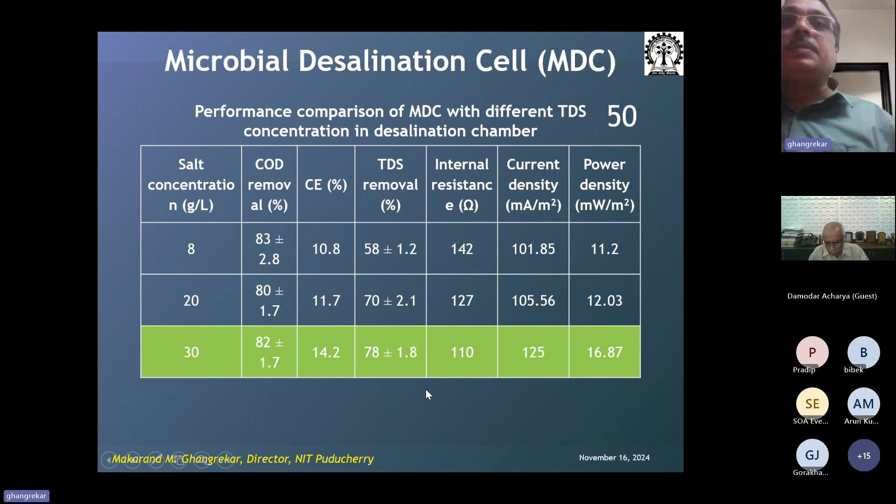Now I'm working with another project from Praj Industries for scaling up of this device, and that work is ongoing. The last technology which I would like to demonstrate is microbial electrosynthesis.

MES could also be another cleaner or sustainable approach for capturing CO2 and converting it into various chemicals. CO2 generated from the wastewater treatment plant itself can be captured and used, or the CO2 present in the flue gas of the industry, which is of the order of 12 to 20%, can also be captured and converted into various value-added chemicals using this microbial electrosynthesis system, where we use microbial life for facilitating reduction of CO2.

We all know there are thermodynamic limitations, and because of that, natural CO2 reduction is not possible, and that requires some external energy to overcome that thermodynamic barrier. For that purpose, instead of harvesting electricity in this system, we need to impose a potential, typically less than 1 volt, to take that reaction forward.

Acetogens or whatever microorganism we target are typically cultured on the cathode. In the anodic chamber, we may treat wastewater, or most scientists use fresh water, where water splitting occurs because protons and electrons are separated. Electrons are diverted towards the cathode, and protons, in similar fashion as in MFC, are allowed to pass through the PEM to reach the cathode, where, with the help of the imposed potential, this acetogenic microorganism can help in synthesizing acetate or other compounds.

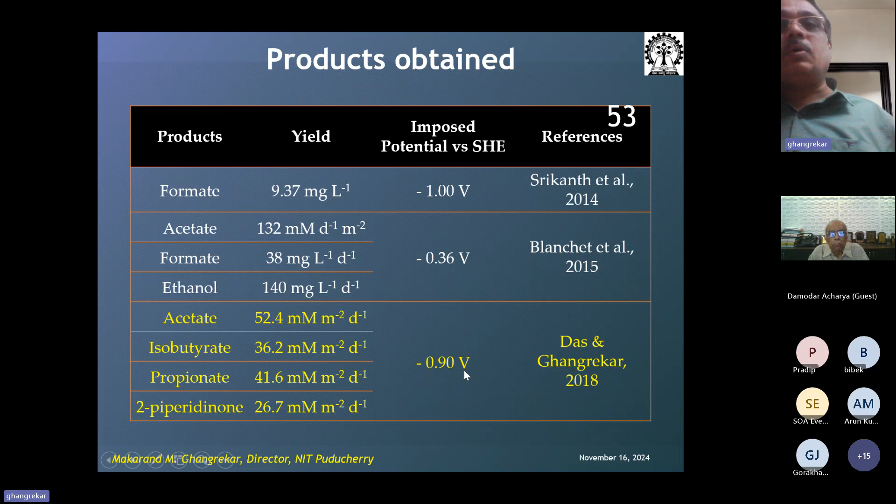One of the largest MES setups, demonstrated 2 years back by my research scholar Dr. Das, is 12.6 liter capacity. The idea here was that the UASB reactor's biogas typically has about 35% carbon dioxide, so we can pass this biogas through the MES and the carbon dioxide can be utilized, which helps in reforming the biogas and enriching the methane content.

Biogas leaving this MES typically had more than 80% methane. Complete enrichment could not occur because of thermodynamic limitations, and multiple reactors would be required to further increase the methane content. But importantly, we were able to successfully synthesize acetate using this carbon dioxide, which would otherwise be released into the atmosphere.

At that time, the yield was only around 400 milligrams per liter. Now, the present research scholar, using different catalysts and different reactor configurations, has been able to reach up to 2.5 grams per liter of acetate synthesis using this MES system.